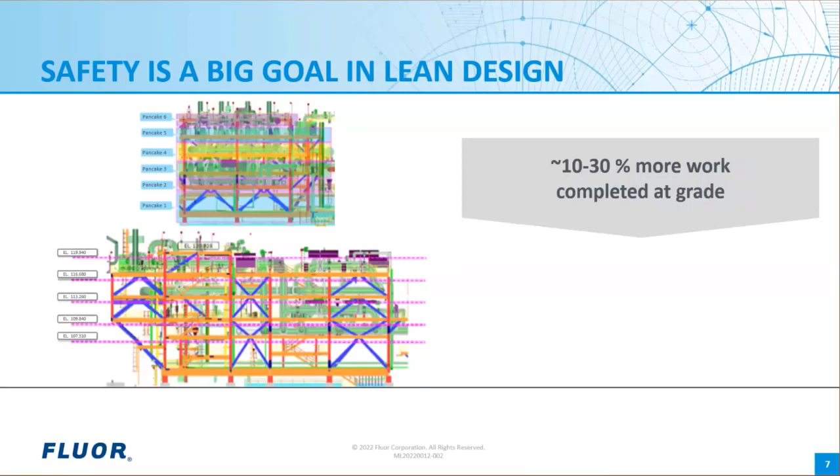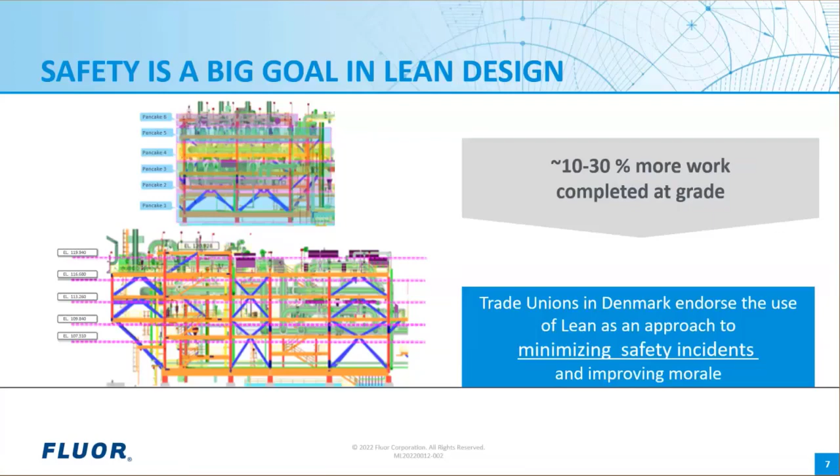Lean techniques were used to explore trade-offs and multiple options in order to improve the quantum of work at grade by 10% to 30%. It's interesting to note that trade unions in Denmark endorse the use of Lean as an approach to minimizing safety incidents and improving morale.

Our session today starts with focus on the needs of clients and proceeds to contemplate a new way to look at waste within capital projects. We dwell briefly on the paradigm shift and characteristics of Lean and IPD execution, and provide a compelling case for adoption of Lean. We propose, finally, a holistic approach to the problem.

The Lean journey starts with a simple question: what does the client or owner value? This is a question that can be asked for the project as a whole or in the context of granular design and construction activities. One thing that owners value these days, which we are all familiar with, is project completion on an ambitious timeline, sometimes referred to as a gold medal schedule. Additionally, owners consciously aim for a cost much lower than the price offered by the market. The reason for this will become apparent as we delve a little deeper into this topic.

However, in response to advice from several independent consulting firms who are providing thought leadership on the topic of capital projects, owners are wanting to be competitive in their segment. They set targets which can be termed capital effectiveness targets or competitive bets. These targets can be in operations, maintenance, or even distribution of the product, but mainly achieved in the design and engineering aspect, as you would all recognize.

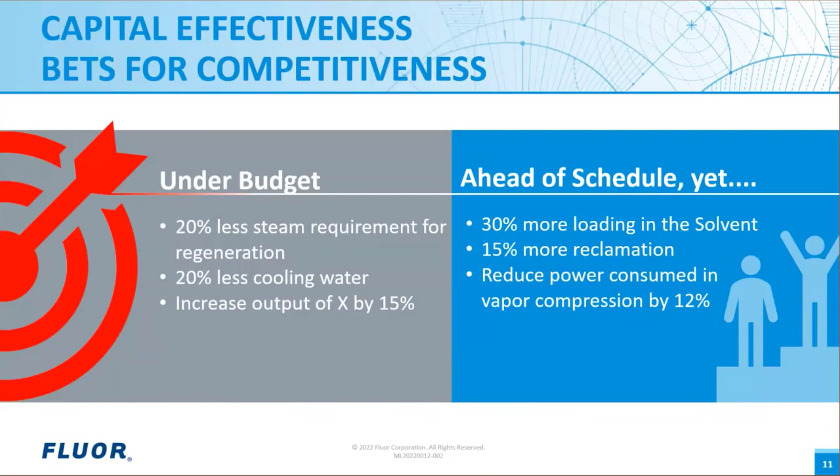What then is the source of these trifold benefits that owners see? Undoubtedly, the source of all the benefit lies in the design and engineering of the facility or plant. In the illustration adapted from the work of Dr. Glenn Ballard, director of the Project Production Laboratory at the University of California, Berkeley, if we were to consider the cost of construction to be a unit of 1, which equates to, say, 1 billion, to keep our math easy, then relative to this, the cost of design and engineering will be 0.1 or 100 million.

The cost of maintenance and operations over the life of the asset may be 4.3 billion, and provision of services may be as much as 42 billion. On examining the contribution of various aspects of a plant to the lifetime cost of the asset, the cost of design and engineering is minuscule, but has the largest bearing on the overall cost and profitability of the plant. I say profitability of the plant because the revenue generated by the plant should exceed the sum of the costs shown in this picture. Whilst this makes us proud as engineers, it raises another interesting question.

How can we leverage more than we do presently the relatively small effort within the design phase to greater benefit of a project? We can, if we can reframe the opportunity. Visualize, if you will, a large hospital in Canada. A busy surgery experiencing a severe backlog in a specialty that sees patients coming from all parts of the province. It's a crisis, undoubtedly. In this real story of my client, the CEO of the hospital and an eminent surgeon himself considered all the familiar options to overcome the crisis. A section of his leadership urged him to increase surgical space, and others thought it was a paucity of surgeons.

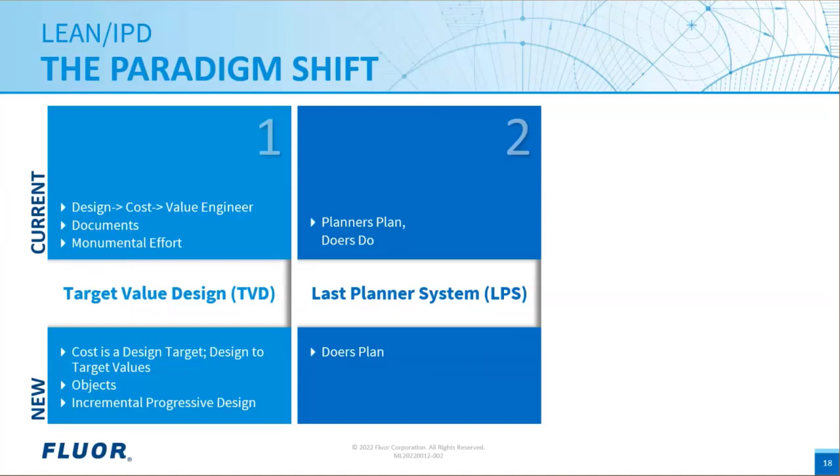The last aspect is broadly called integrated project delivery. IPD originated in lean relational contracting and aims to create a project community, united by a single contract signed by the client, prime contractor, engineer, and all key builders. They are also united in purpose by one set of goals they establish collaboratively. They have collective responsibility for meeting goals and share equitably in profits, cost saving, and contingency savings.

On to you, Anand, to discuss the characteristics of working this way. Thank you, Jayne. With Jayne having described the paradigm shift, let's review some important characteristics of lean execution. Lean design is primarily characterized by collaborative working. For example, what happens when electrical engineers start with the electrical load list? They're likely to miss a number of power consumers. It's hard to determine if a list is complete, is it not?

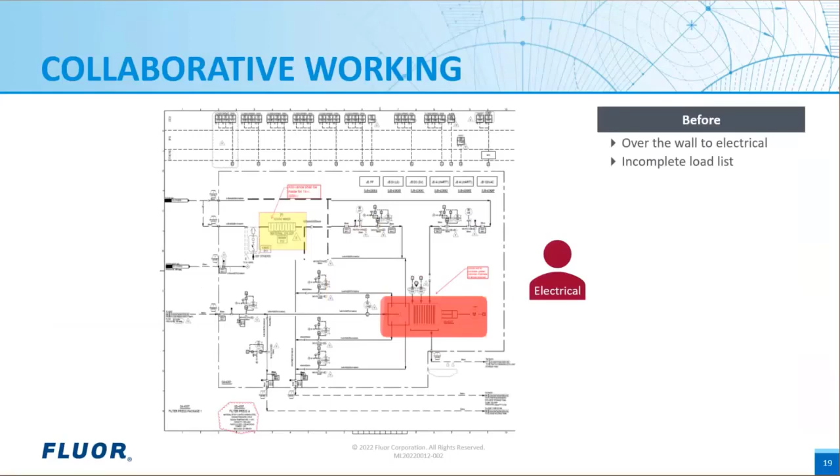In this example, you see mechanical, process, electrical, reviewing functionality, collaboratively working in the design space. They use a lean technique to spotlight unit, area, and facility loads through a structured discussion. If a power consumer is missing or unknown, they use other lean techniques such as 5 whys and 5 hows to determine a path to estimating them. The 5 whys is a root cause analysis technique that you're all probably familiar with. And the 5 hows is a technique to generate multiple alternatives to determine the power load of which one can be applied. Thus, surprises are prevented and potential impact on motor control centers and substations avoided.

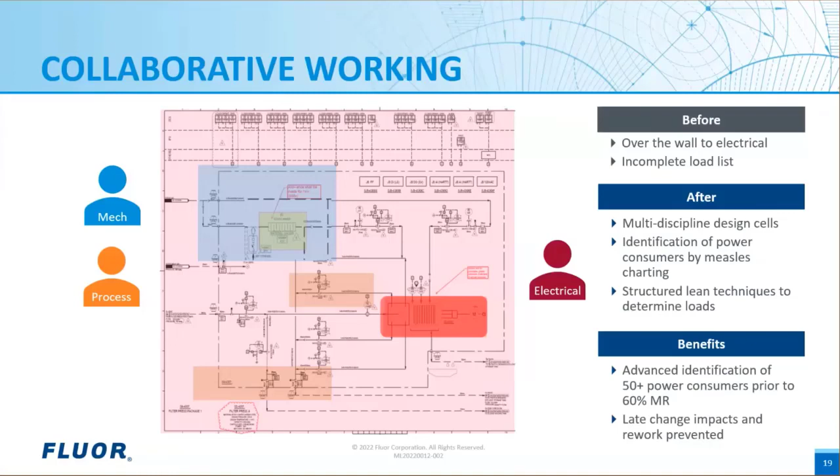Lean design and construction is also characterized by integration. Integration refers to the way in which work methods and information systems bring different parties together. Let's revisit the earlier safety topic in which more work was moved to grade. In this example, Fluor and the fabricator are working in the 3D model together collaboratively to determine panel volumes, pancake volumes, and splice points. They conducted their design operations in a co-design fashion to complete 152 modules in a few short weeks. This integration provides for a robust design that suffers minimal backtracking that Jayne referred to earlier on, reduces the cost of fabrication, and also cuts schedule.

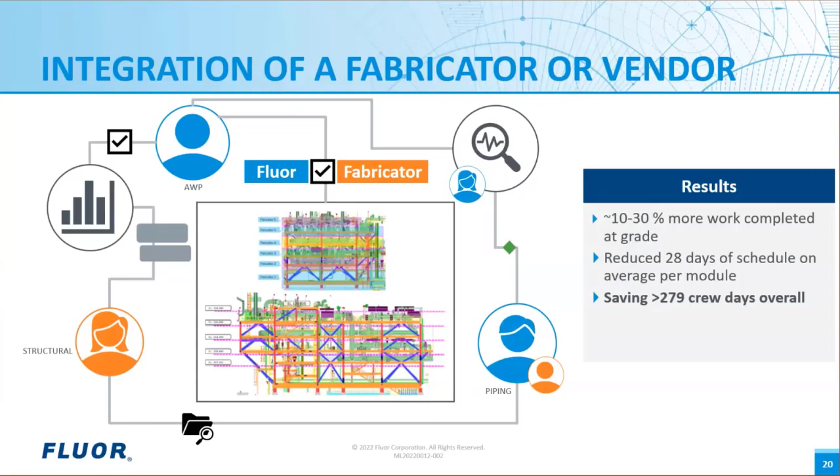Designers and engineers work within a single context with focus on one task at any given time. This further reduces the loss of productivity due to the phenomenon of context switching and multitasking, again referred to by Jayne earlier on.

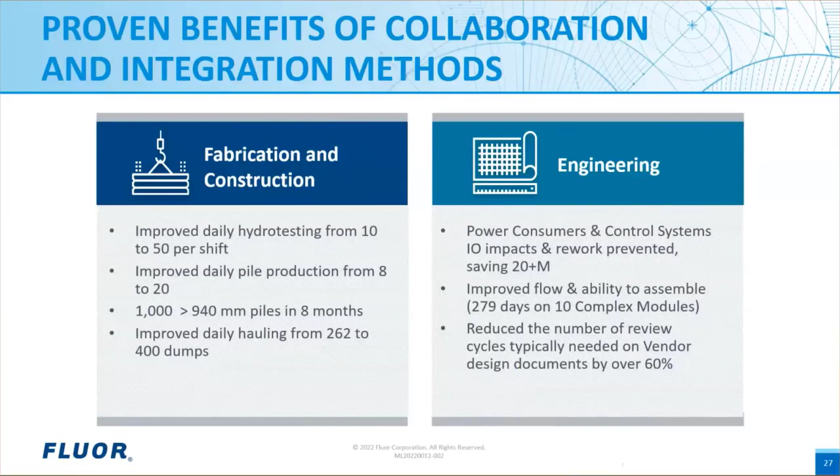Thank you, Anand. Why do we think that the three aspects of the paradigm shift can make a difference to capital projects? Within FLUOR, the use of such methods have produced remarkable results. A scan of the results produced from the application of Lean methods on FLUOR projects over the last 3 years demonstrates the efficacy of the methods. However, what if we were to execute these methods holistically, supported by the last category of integrated project delivery? Would we have better project outcomes? Is there evidence to suggest that we can do much better?

On a sampling of projects using Lean at FLUOR, we present evidence from 5 highly successful projects of the efficacy of using Lean methods in combination with a multi-party contract. All projects were ahead on schedule and within cost, and the projects were described by the project management team members as being very professionally fulfilling and satisfying. Several Lean methods were applied, testifying to the fact that the combination of methods works to change project outcomes.

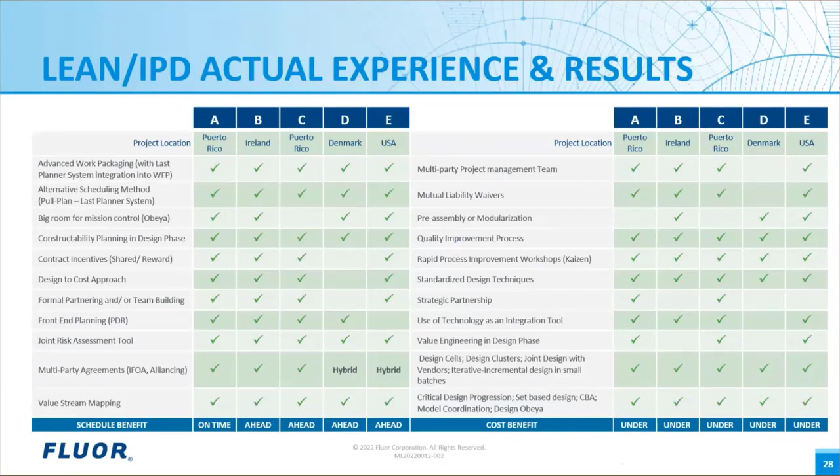According to the Lean Construction Institute, like any good operating system, Lean is intended to be applied holistically to obtain maximum value. All of the key players need to be engaged and all of the major components and approaches applied fully. This framework suggests the project phases at which TVD and LPS are introduced and applied. However, it should be noted that IPD is the enabling framework for successful execution of TVD and LPS.

FLUOR's intention is to exceed the benchmark set by the commercial and infrastructure construction industries in the quest to add value to owners. FLUOR views Final Report 341 from CII as a good benchmark, but one that can be exceeded through commitment of the project leadership.

FLUOR has developed an approach to holistically executing Lean, where Lean methods are gradually introduced at the right time in the project lifecycle. And FLUOR is learning from the deficiencies of existing application within the industry and correcting it by the assimilation of methods that have worked in other design and development industries. An example of this is the use of trade-off curves to assist in speedy design, or the execution of construction work using production principles in order to meet schedule.

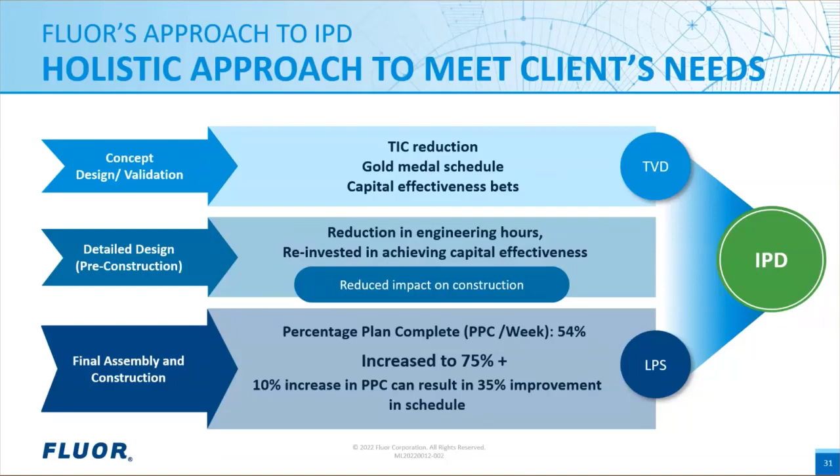We will leave you with some final thoughts on building Lean capability. Everybody on a project is intended to be a practitioner of Lean. Supervisors lead Lean. In attempting to develop Lean capabilities, at first, an infusion of skills from outside the organization may be necessary. Frontline designers, engineers, and craft workers learn these new ways of thinking and working, solidified through repetition and experience.

In order to gain traction with Lean, a good practice is to have an internal team of Lean coaches and consultants who, through persistent coaching and mentoring, will enable the project to gain a critical mass of Lean skills. Another opportunity is to look for some of these coaching capabilities within our partners' organizations. That can also be helpful.

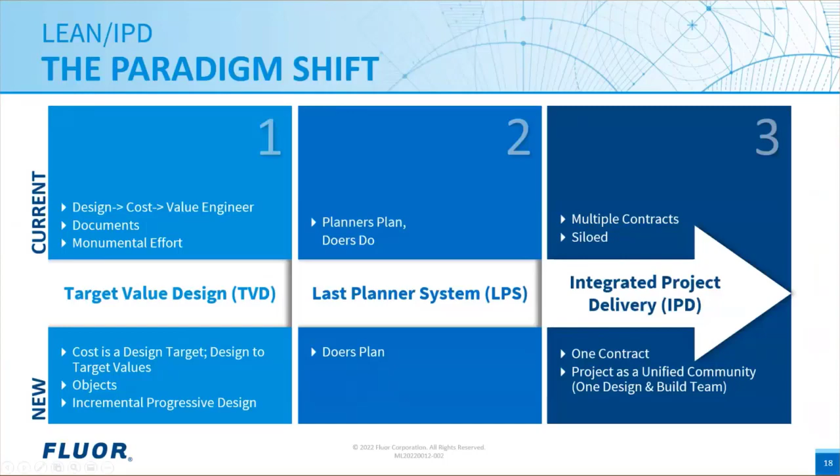They can reduce design changes and RFIs. You can steer design to meet cost targets. You also can create a knowledge base for future use by owners and engineers alike. It can improve constructability. They can be the basis for improving the plant performance, faster decisions in pre-FEED and FEED, and better quality of solutions.

What can they address? In our world, some things that come to my mind: fastening, vibration, stress, tank pressures, bending moment, compressive forces, and so on and so forth, for several potential input variables and materials of construction. I hope that served to answer the question.

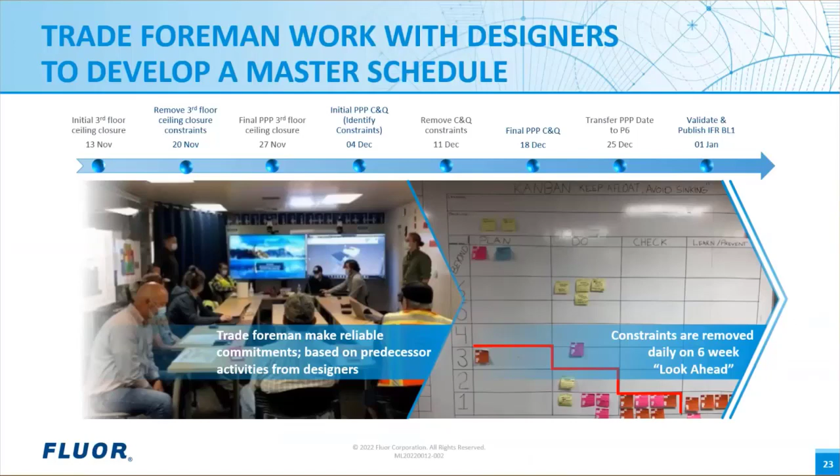Thank you. Okay, another one. You mentioned the paradigm shift. How long does it take to adopt this process or methodology within a team? So it's introduced. And again, some people think that there are all these elements, and obviously it seems like a really big beast. But what happens is progressively, as the project starts up, all these lean methods kick in one at a time. So you're really doing it in small pieces, not the whole thing at one time. So when you introduce these methods in a progressive, incremental fashion, there isn't that much of a big effort. It kind of gently infuses itself into the system, and it happens as the project progresses.

I wouldn't like to call out a separate timeline for this. It just happens as you execute the project very seamlessly. Right, but the idea is that people are learning these methods and they need coaching to some degree to learn them. And then after some repetition, they can carry on and work in that way themselves.

Correct. And it's no different from anything else our designers and engineers learn. Obviously everything we do has a learning element to it. And I wouldn't think that this is going to be rocket science for any of our designers and engineers.

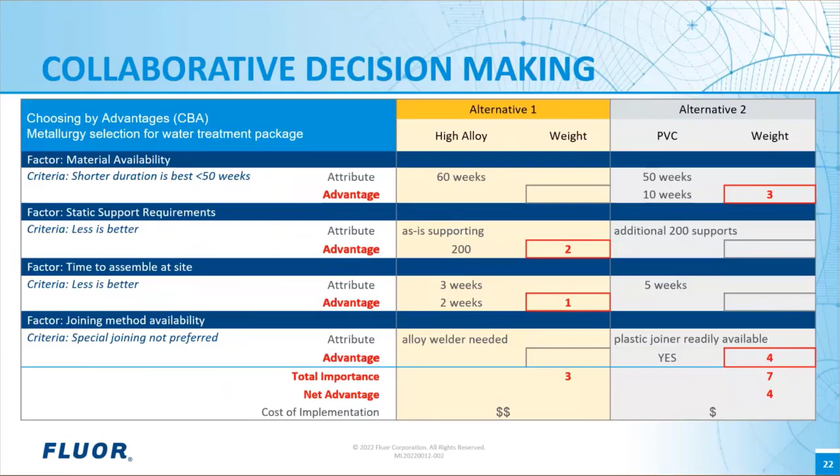The magic of this decision making, though, is all about getting those right design partners or parties together to make this decision, and to have a nice structured way of getting through it. And in that way, it also provides documentation of that decision. You don't have one discipline or one party making a decision that puts a lot of unneeded work on another discipline or on construction, if you're able to bring in all the right people at the beginning. So yeah, we just showed two alternatives there, but you can definitely have several alternatives. Did that answer the question? Yes, it did. Thank you.